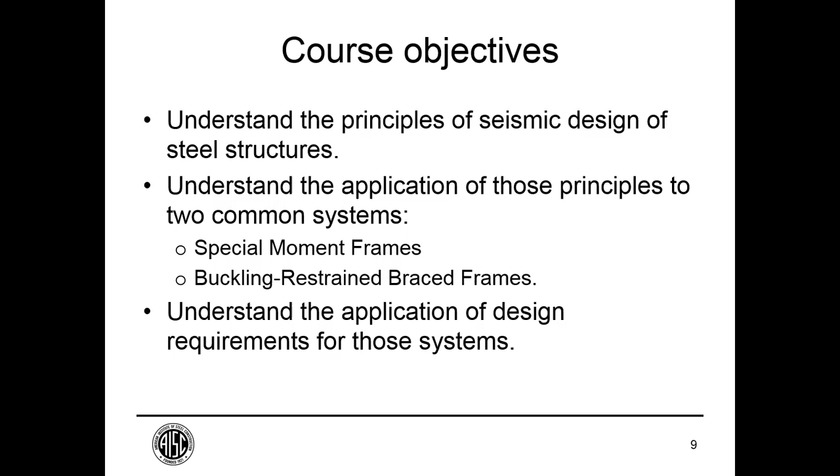We reviewed the course objectives last week. I won't spend more time on this than to say tonight's course on special moment frames fits into it, both showing the principles of seismic design and the application to this system. As always, I would direct you to the resources identified for this class. I did draw on the Facts for Steel Buildings: Earthquakes and Seismic Design in a couple of the answers to questions I received via email after last week's session, and that's a free download from AISC.

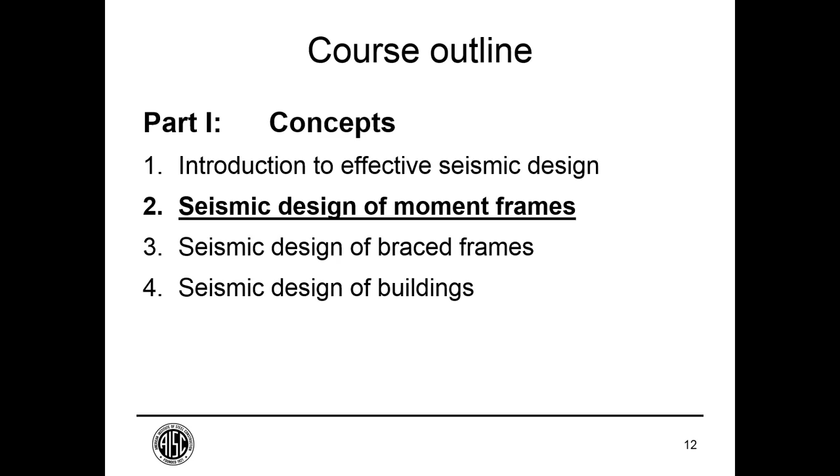Other resources include the AISC Solution Center and Night School. So we've started with introduction to seismic design. Tonight is special moment frames. We'll hit braced frames and buildings in general in the next few weeks, and then we'll get into the design itself. Everything we look at today in general terms for design of moment frames, we'll revisit in a design example in a few weeks.

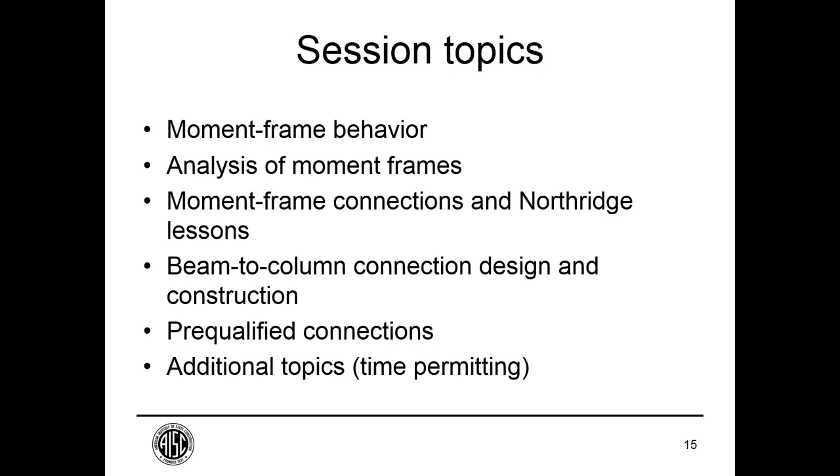So tonight, Session 2, Seismic Design of Moment Frames. We will talk about the behavior of moment frames, the elastic behavior and some of the post-elastic behavior, and how we analyze frames. We will look in detail at the beam-to-column connection, and we've learned a lot in the last 20 or so years after the Northridge earthquake, so we'll be looking at those lessons in great detail. We'll look at how beam-to-column connections are made in the field, we'll review pre-qualified connections, and there are a few other topics I hope we'll have time to touch on at the end of this class.

Let's start with moment frame behavior in general. Our lateral resistance involves horizontal forces. Those horizontal forces have to be resisted through column shear. There are no braces. If you cut a horizontal section across any of the stories, that horizontal force has to be there in column shear, and of course, where there's shear, there's moment. If the column develops moment, the beam has to develop moment.

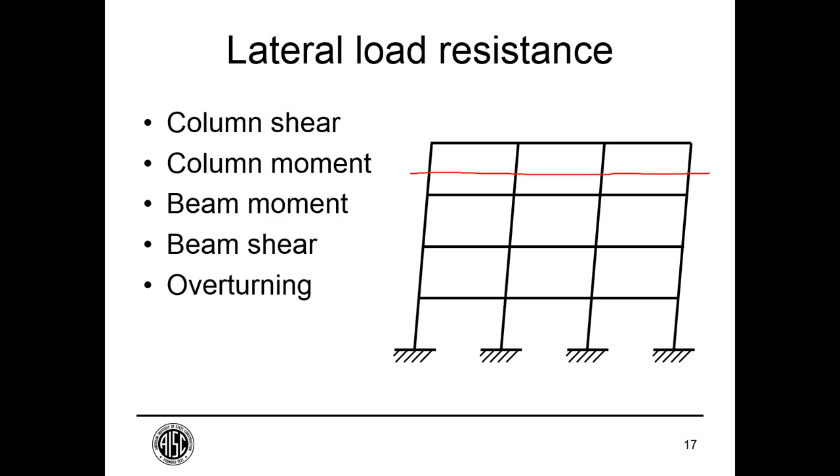The column moment has to go somewhere—it's not just a cantilever from the base. And of course, where there's moment, there's shear, so since the beam has moment, the beam has shear. Those beam shear forces accumulate in the end columns into overturning axial forces. Those are the forces we're primarily concerned with: the analysis of the magnitude of those forces and proportioning, so we get yielding where we want it. Those are the themes of the seismic design of moment frames.

So we'll start with the lateral forces which induce the column shear—there's really nowhere else for the lateral shear to go. So we have a shear diagram that looks like this. I have intentionally made the interior columns appear to have more shear than the exterior columns; that's generally the way these things work. So a little bit more shear in the interior columns, a little less in the exterior columns, but the exterior columns, of course, take the overturning.

As I said, where there's shear, there's moment. This is a diagram of the moment distribution in the columns only, and the assumption here is that the inflection point is mid-height of every story. That's not a correct assumption, but it's a good way to understand the behavior of the moment frames, to understand that the moment reverses and that these columns go into double curvature.

During the course of the earthquake, it's quite complex, and that inflection point moves up and down quite a bit. Occasionally, columns may go into single curvature and have more complicated behavior. But for purposes of design, this condition, where columns are in double curvature with the greatest magnitude of column moment reversing at the beam to column connection, is what we focus on for design.

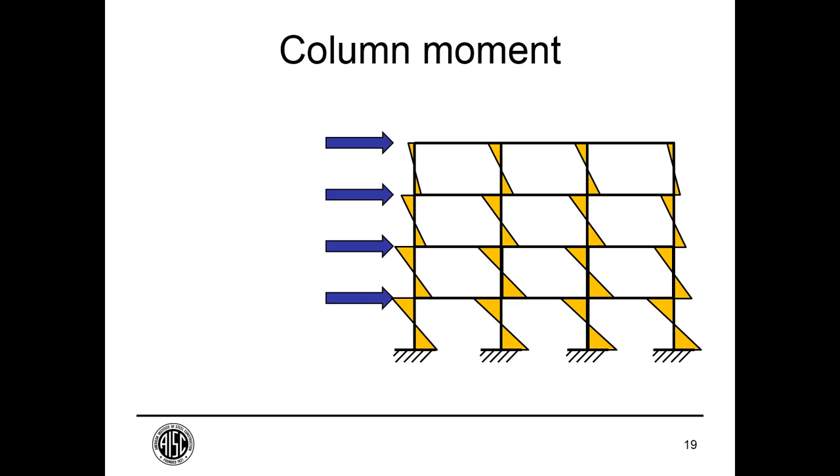So the columns have moment. As I said, if the columns have moment, the beams have moment too. So as that column moment reverses, there is a discontinuity in the column moment diagram. That discontinuity in moment has to go somewhere, and it goes to the beam end. And so the beams have moment diagrams that look something like this.

This is just the seismic moment in the beam. The gravity moment will alter the shape of those triangular segments of the moment diagram, as we'll see later. But this is a good idealization. So the beam moment diagram has a discontinuity at the column.

That moment goes to the column. The column moment diagram has a discontinuity at the beam. That moment goes to the beam. And of course, where there is moment, there is shear. The beams have shear diagrams that look something like this. Perhaps they are equal, perhaps they are unequal. It depends on the bay span, the beam sizes, etc.

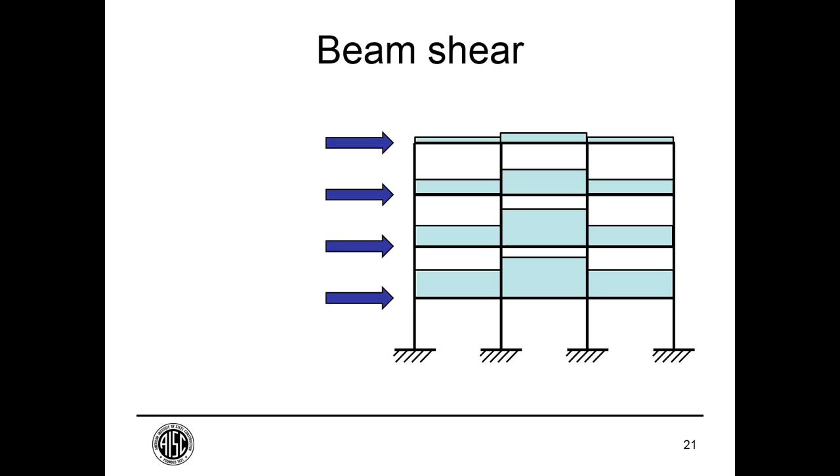And the shear accumulates into overturning forces, which are generally quite large at the end columns of the frame, and there may be some small overturning moment in interior columns if the beam shears are unequal.

So that's a representation of how a frame might behave, and all of that has so far been based on these line diagrams, the center line of the column and the center line of the beam.

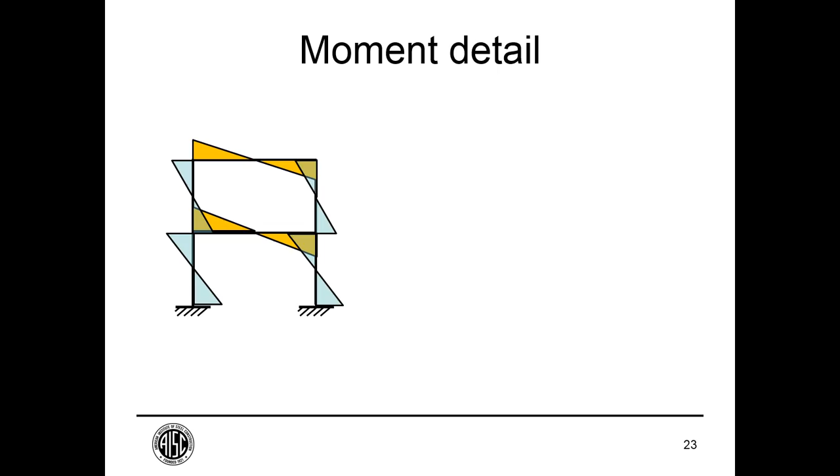Now, if we look at an actual frame, the column has some depth and the beam has some depth. So considering the column depth, the beam stops short of the column, and so the beam moment diagram doesn't go to the column center line, it goes to the end of the beam. And stopping short, the value of the moment where the beam actually exists is less than the value of the moment at the column center line.

Similarly, the beam has a depth, which means this moment reversal in the column doesn't occur over 0 inches, it occurs over the depth of the beam, 21 inches, 24 inches, 30 inches. So that moment diagram, instead of having a horizontal instant reversal, has a reversal over the depth of the beam. And so it has this sort of shape. And that has a couple of implications, as we'll see.

One is similar to the beam: the maximum moment of the column is less than the theoretical moment at the beam center line. It's the moment essentially at the top or bottom flange of the beam. The moment near the center line is close to 0. But also there's a zone here with a steep moment gradient, and we'll look at the implications of that in just a moment.

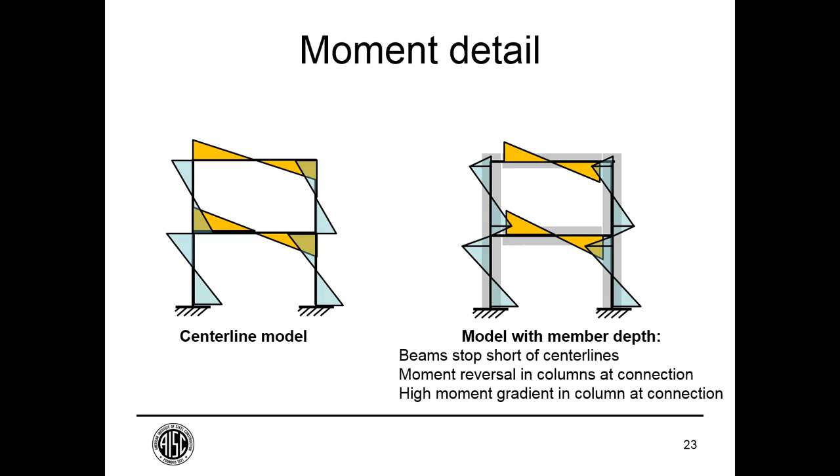So beams stop short of center lines, there's moment reversal of the column at the connection, and a high moment gradient at that connection.

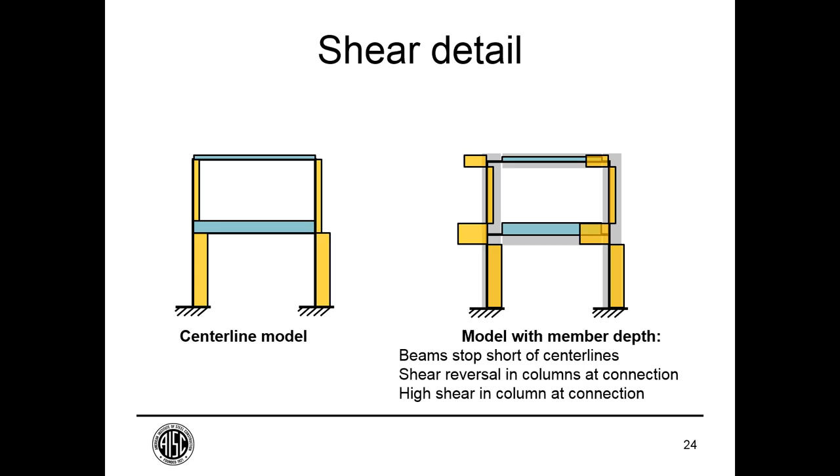Okay, so that's the basic mechanics of the system of the frame. Let's review what we discussed last week, that we would like to encourage for the moment frames flexural hinging to occur in the beams rather than in the columns, so that we might form a mechanism that looks like this.

And you can see each end of the beam is developing a flexural hinge, and the size of this dot indicates the degree of rotation. Of course, this is just a conceptual sketch.

As I mentioned before, you can't really form this mechanism unless you get some rotation at the column base. But for the most part, the way that we idealize and try to encourage behavior is to have yielding occur in the beams and not in the columns. There are a number of reasons for that.

One is that the columns are resisting sometimes quite high axial forces. This also has the benefit of discouraging story mechanisms. So if we encourage flexural yielding in the beams, we are, in so doing, discouraging flexural yielding in the columns.

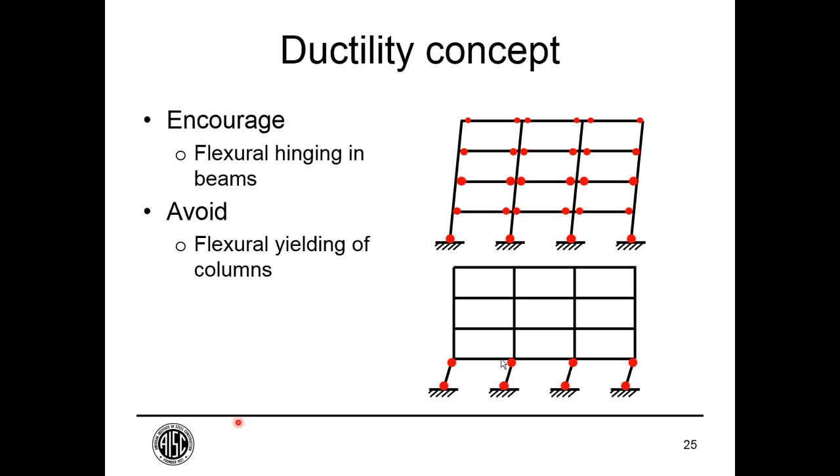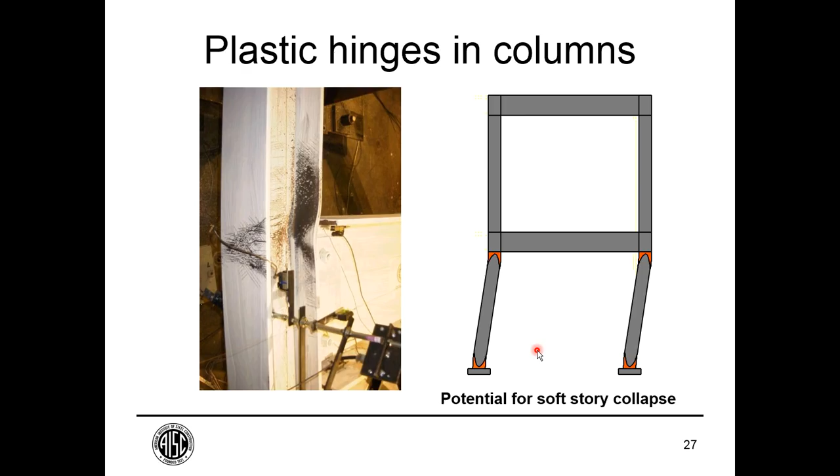This is something that we try to avoid, in part because of the large axial forces that can occur in columns, and also because of the potential for forming story mechanisms, as shown in the diagram on the right. So this would not be compliant with some of the rules we have, at least for special moment frames, and it's behavior that we try to discourage.

Also, this high shear region that we discussed before, the column can yield in shear, and there are potentially some issues with that behavior. One is that it's possible that story mechanisms could form, since we're still getting that rotation in the column.

Also, similar to flexural yielding in the column, we're a bit nervous about high axial forces in these column flanges, and the column flanges having to undergo significant kinking as the panel zone yields. Additionally, that kinking is right adjacent to the highly stressed beam to column flange weld.

Even if we've pushed the plastic hinge away from the face of the column, we still have very high forces in these welds of the beam flange to column flange, and putting the column flange through significant bending strains there can create the opportunity for those welds to initiate a crack and then propagate that crack through the weld. So the provisions, as we'll see later, do allow a little bit of panel zone yielding, but in general try to encourage beam flexural yielding even over panel zone yielding.

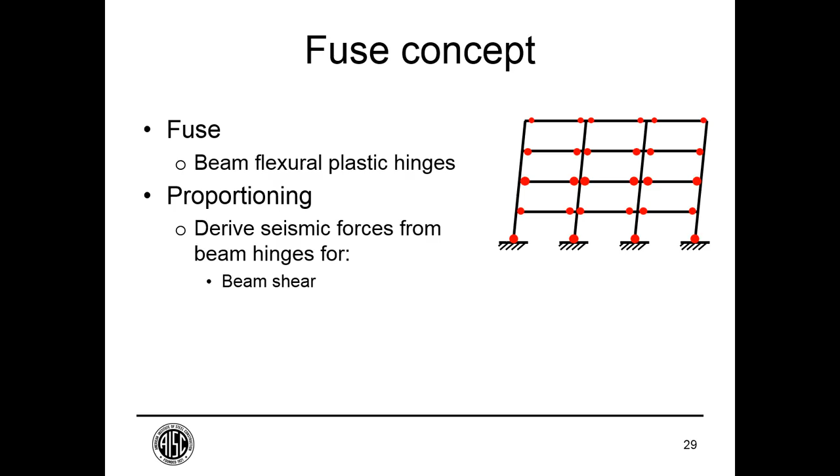Okay, so returning to this concept here, we are proportioning so that we get flexural yielding in the beam. So we start with the plastic hinge formation at each end of the beam and derive the beam shear forces, and we also derive a number of forces in the column. The column shear at that location we will derive from the beam shear, and I'll show you how. The column flexure, essentially, we're deriving from the beam flexure.

The column axial force, essentially, we are with a little bit of imprecision - that column axial force does derive from the estimated proportioning of the beam. And then the column panel zone shear we explicitly calculate from that beam flexural capacity.

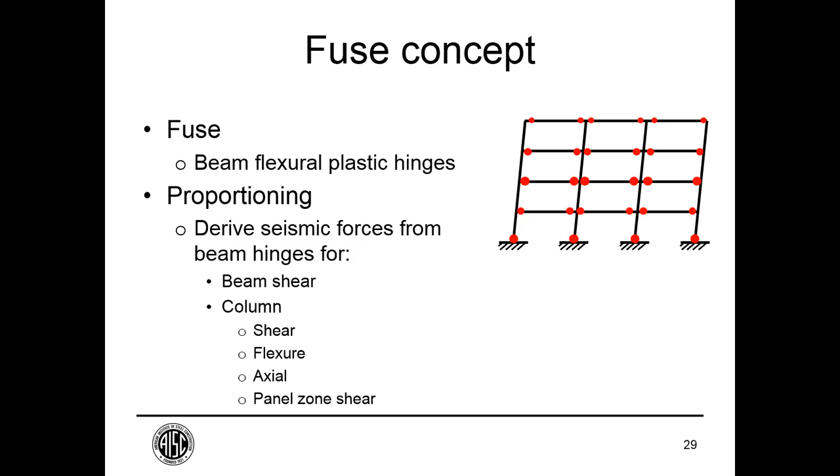All right, so let's start. Let's move on to the elastic analysis of the frame. The frames have different sources of flexibility. All of these sources of flexibility have to be considered. They don't necessarily all have to figure in your calculations.

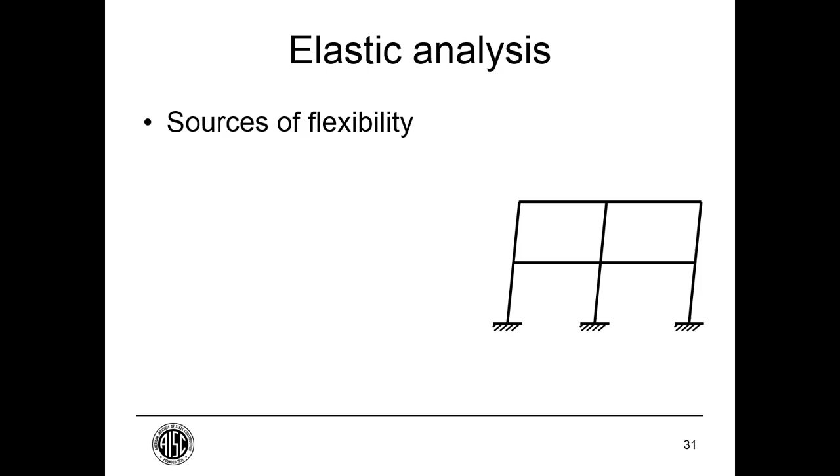Most software will directly be able to address most, if not all, of these sources of flexibility, but in some cases the modeling effort is quite intense. So let's start by listing these sources of flexibility.

Axial deformations of the columns - this is important for taller structures. For a two-story frame such as I've shown here, probably not very important. But if you're dealing with a 15 or 20-story building, obviously you want to be using an analysis that can account for the axial deformations of these columns.

Very important, the flexural deformations of the beams and the columns. This is always the primary source of flexibility of a moment frame. Each of these members has a moment of inertia, and it's the EI over L that accounts for the stiffness of the frame beams and frame columns. So that has to be accounted for in virtually every analysis of a moment frame.

There can be shear deformations in both the beams and the columns. Typically, these shear deformations are quite low, especially for typical story heights and for the span to depth limitations that we have for special and intermediate moment frames. So yes, there are shear deformations, but with a minimum span to depth ratio of 7 for a special moment frame, the corresponding shear in the beam won't be that large, and so the corresponding shear deformation won't be nearly as large as the flexural deformation.

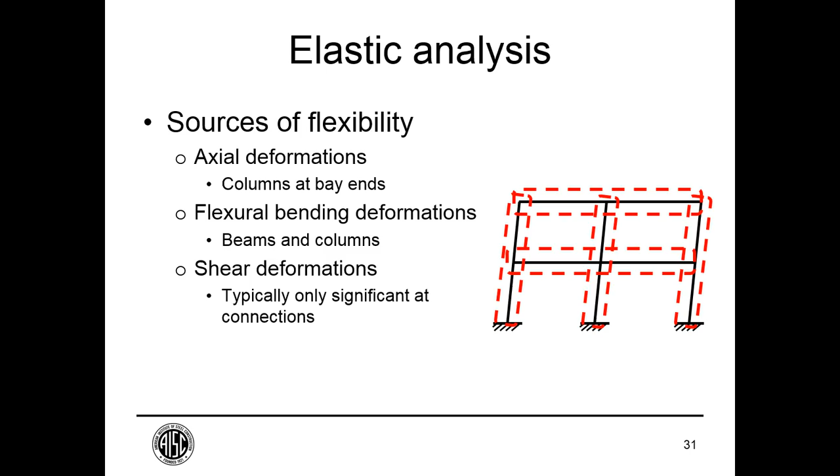Now the shear deformations at the connections may be significant. That's the panel zone shear that we talked about a few slides ago. That panel zone shear can be quite large, and it can cause stresses close to the yield stress of the column web, and that can lead to a lot of deformation that then translates to a lot of extra drift.

Then there are some connections that in moving the plastic hinge away from the column face either weaken the beam or strengthen the beam. So the reduced beam section connection that we'll look at quite a bit in tonight's session, and then in the design, reduces the area of the beam flange and therefore leads potentially to some extra drift, and so we'll show calculations for that later.

Other connections, such as proprietary side plate connection, actually make the beam stiffer at the face of the column, and so create a segment of the beam that is stiffer than the rest of the beam, and that perhaps should be accounted for in the analysis. Certainly, the drift will be lower, and that can be beneficial in allowing perhaps a smaller beam size or a smaller column size.

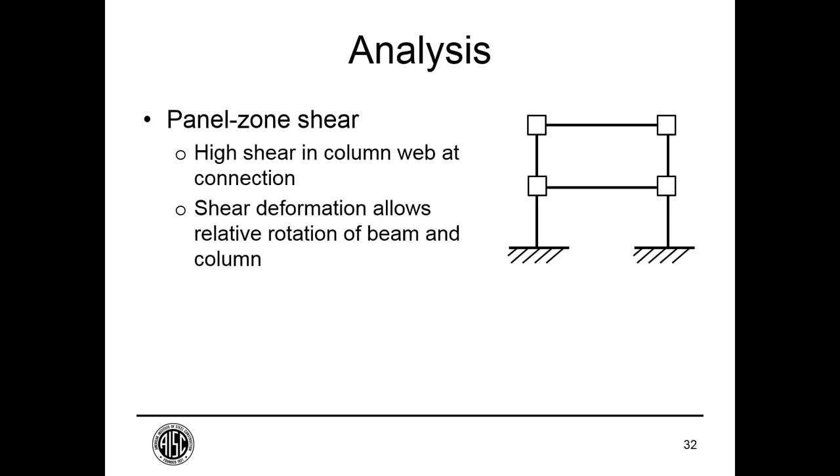Panel zone shear is high shear in the column web in that connection region. Those shear deformations can allow relative rotation of the beam and the column. There are different ways of addressing it.

One way is to model it explicitly, including the flexibility of that panel zone in the model. The other way is not really modeling, though it does have modeling implications—using extra beam and column flexibility to represent panel zone shear flexibility. That is using a center line model. Let's see that in the next couple of slides.

Okay, so here is the model with the panel zone. As I mentioned earlier, the beam doesn't actually reach the column center line. So in this model, the beam flexibility stops at the face of the column, and the flexural length is from face of column to face of column.

In this modeling technique, the flexural length of the column is between the flanges at each story—from the bottom flange at the upper story to the top flange at the lower story, and that's the flexural length of the column. So far so good, but there is the panel zone to deal with.

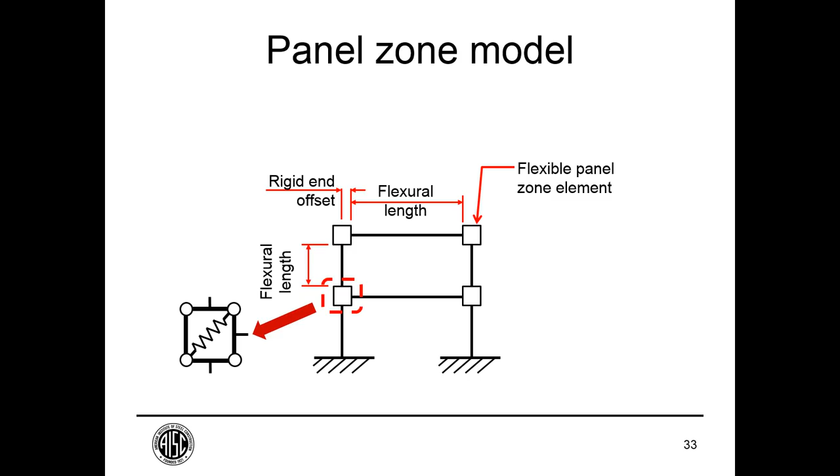Within that zone, it's not a rigid square. It is instead a flexible element that represents the flexibility of the column in that region, including both flexural deformations and shear deformations, which can be significant. This is an accurate way of doing it, and it accounts for the significant sources of flexibility explicitly, but it does require some modeling effort.

So how do you model the panel zone? There is some guidance in a NIST document that we'll see at the end in one of the identified resources. A reasonable way of doing it is to have a scissor element with a spring at every single beam to column connection, representing the stiffness as a function of the column properties and the depth of the beam.

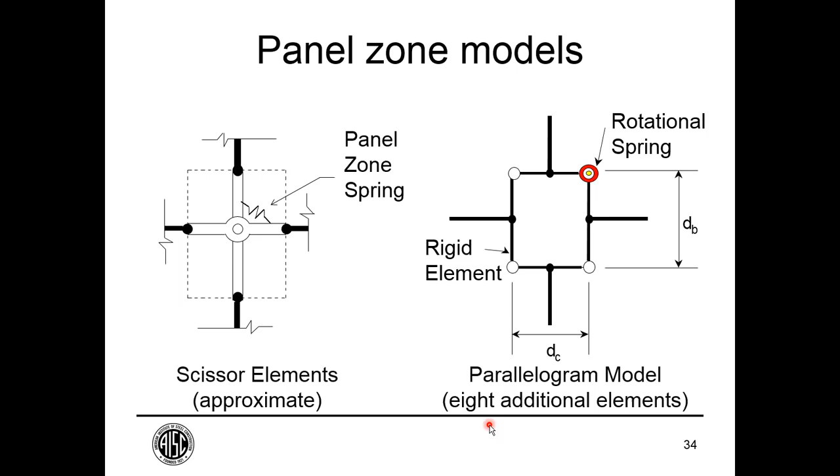A more accurate method that unfortunately requires 8 additional elements is to create a frame at the connection, with the depth of the beam and the depth of the column, using rigid elements and a rotational spring. Again, that rotational spring accounts for the flexibility as a function of the column section properties and the depth of the beam.

The way that most engineers do it, at least for buildings with reasonable span to depth ratios, the simpler way is to allow the flexural length of the beam to go from center line to center line, and the flexural length of the column to go from beam center line to beam center line, without anything that explicitly models the behavior of that panel zone.

So there's a missing source of flexibility, the panel zone, but there's extra flexibility in both the beam and the column. In a number of studies of typical moment frame spans, it's been confirmed that this is a reasonable approximation, and that the drift you get from such a model is reasonably close to the drift you get with a lot more modeling effort.

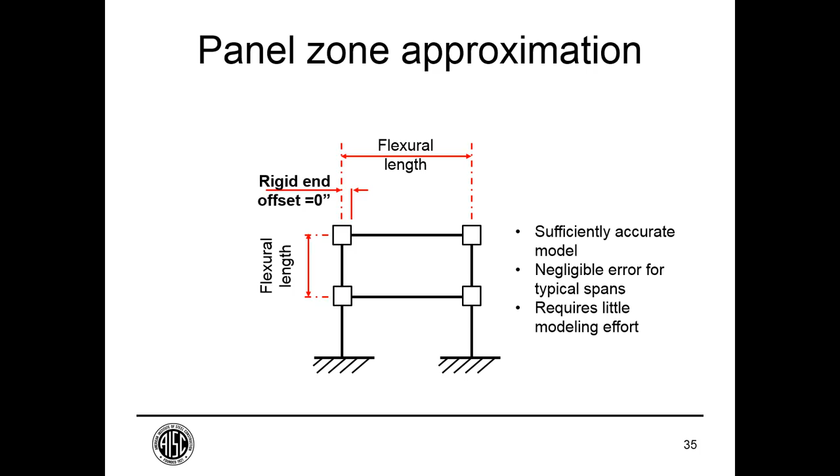Given that our methods of predicting seismic drifts are very approximate, the additional effort of modeling the panel zone does not seem warranted for seismic analysis. This is a sufficiently accurate method. The error is negligible for typical spans, considering our knowledge of loads is very approximate, and our C sub D factor to amplify displacements is also very approximate. So the approximation from this modeling method doesn't add to that error, and it requires little modeling effort. This is recommended for typical buildings.

Now let's go into inelastic modeling. We are assuming that we get plastic hinges at each end of the beam. For purposes of understanding the behavior, I like to use this so-called portal frame method.

Now this isn't exactly the portal frame method that many of us studied in school for design. This is a way to isolate one beam-column subassemblage from inflection point to inflection point, because in my mind that is the unit, that is the brick that the whole moment frame is built out of.

If you understand, design, and proportion this subassemblage correctly, and this is how the building code AISC 341 is written, if you handle this appropriately and then build your frame out of these, proportioning it appropriately as you go, then you get a well-behaved structure. So the key to understanding the moment frame is to understand this beam-column connection out to the inflection points.

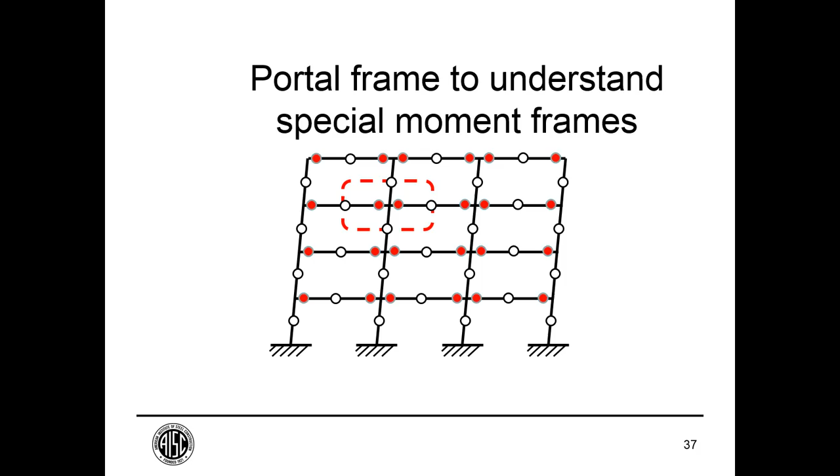So we isolate that element, blow it up, and say that beam has some shear. How do we know what that shear is? Well, we said we're going to start with the plastic hinge formation at each end of the beam.

Now we're looking at a column. We're looking at the right end of the left beam and the left end of the right beam, but the same thing goes. We have two plastic hinges there. We know the value of those plastic hinges. And we've set those inflection points to be at the mid-span of each beam.

So we know that this is a triangular moment diagram, at least as far as the seismic load is concerned. And the shear at that inflection point, or the shear in the beam throughout the length of the beam, is the value of that moment divided by the moment arm from the inflection point to the plastic hinge location. So now we know the shear in the beam, and statics will tell us that there's a corresponding shear in the column.

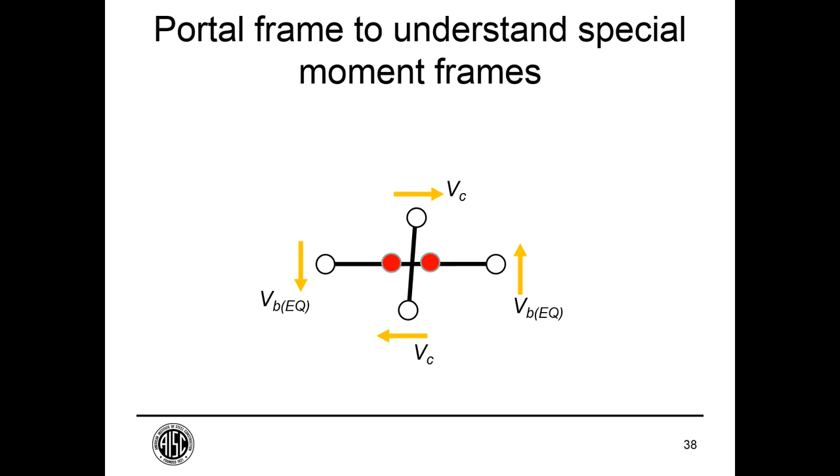For simplicity's sake, I am saying that there is no force being delivered at the floor level. That's obviously not true, but this permits us to simplify the problem and design each of the elements. If you did assume that there was a force at that level, the design is a little more complicated, but by and large you end up with the same sort of proportioning.

All right, so there's our shears in the beam, shears in the columns. Now we're looking at members with depth. There's the moment diagram in the beam going all the way to the column center line. Of course, the beam doesn't exist at the column center line, as I've said before, so the beam stops short there. And there's the column moment going all the way to the beam center line.

And of course, because of the beam depth, that column moment diagram doesn't reverse instantly. It reverses over the depth of the beam. And so that's the actual column moment diagram and the corresponding shear diagram. And that gives us the panel zone shear.

So for each of these subassemblies, I can get essentially design moments in the column, design shears in the column, design shear in the beam, design shear in the beam-to-column connection in addition to the moment. I can get all of these forces that will help me design the beam-to-column connection just from this subassemblage.

Okay, so we start by analyzing the beam, and we assume the plastic hinge forms near the face of the column. We account for things such as the expected strength of material, as we discussed last time, that 50 KSI material doesn't yield exactly at 50 KSI. It probably yields closer to 55 KSI. And then as the plastic hinges go through significant rotation, there's some strain hardening, and that strain hardening might increase the flexural strength 10 or 15%.

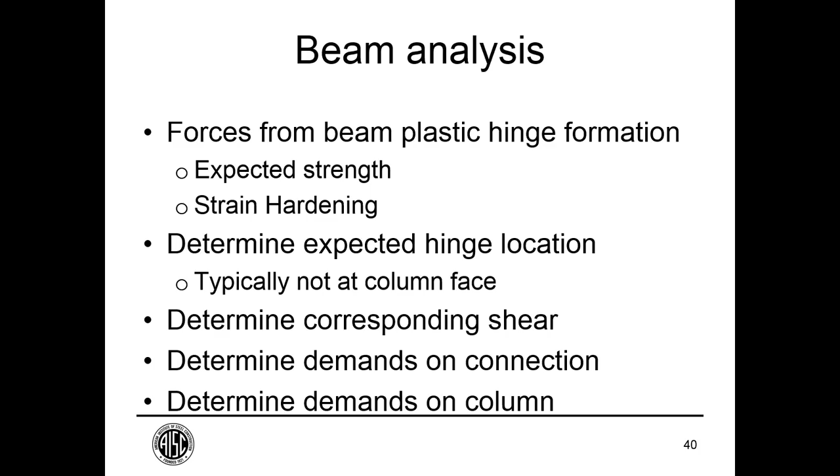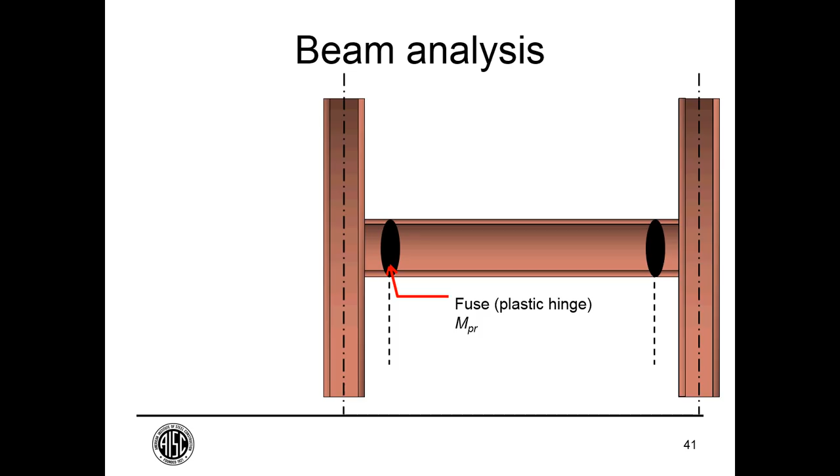That offset from the column face is given the symbol S sub H. As I said, the reduced beam section connection or reinforced connections such as the side plate or bolted flange plate may change this slightly.

So the moment at the column face is somewhat greater than the probable moment at the plastic hinge location. And the demand at the center line, which of course is fictitious because the beam doesn't exist there, that MCL is even larger still. So we're following that moment diagram up to get the seismic moment at the column center line.

The lengths involved are the center to center line length from column to column minus half a column depth at each side, which gets us the moment at the column face. Then minus this dimension S sub H at each side gets us the distance from plastic hinge to plastic hinge, and that distance is given the symbol L sub H.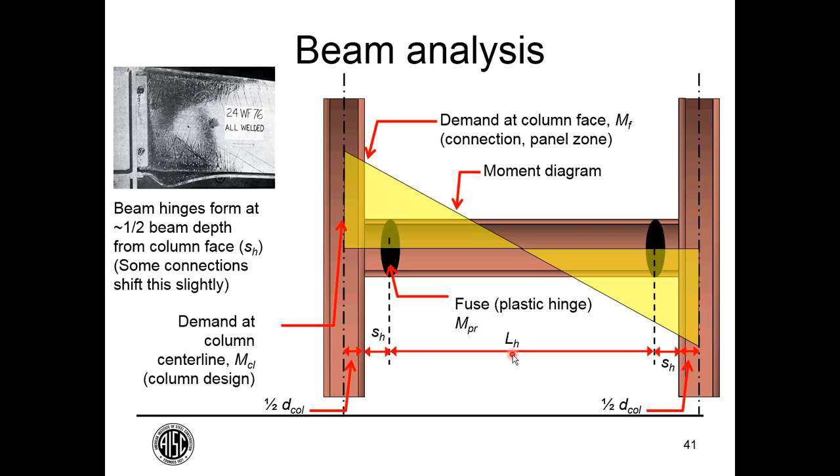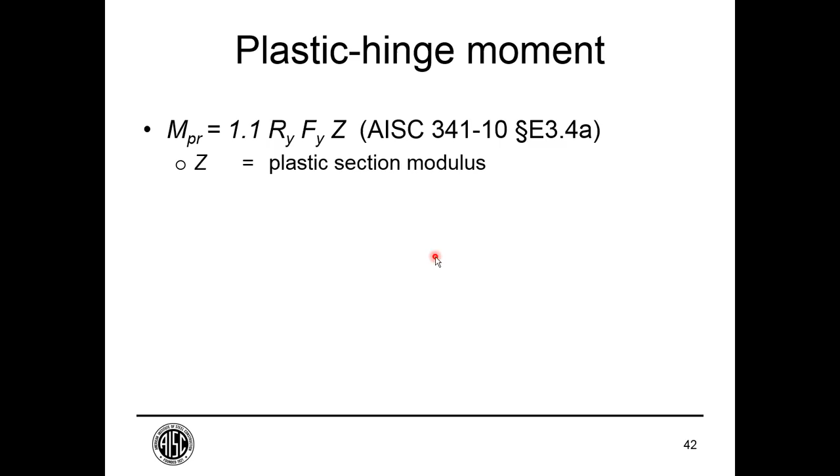The value of that probable moment at the plastic hinge location, given in the 2010 seismic provisions, is 1.1 times Ry Fy Z. Z is the plastic section modulus, and it's going to be reduced for reduced beam section. Fy is the specified minimum, and Ry is that factor representing material over strength. So Ry times Fy is the actual expected material yield strength.

For the A992 material that we use quite a bit of for a special moment frame, that Ry Fy is going to be 55 KSI. That factor 1.1 represents strain hardening.

Now, in the 2016 provisions, it's slightly different. There was a bit of an inconsistency, not much, but we'll talk about AISC 358, the pre-qualified connection standard. That standard gives a value of 1.15 for strain hardening, while the seismic provisions gave 1.1. In 2016, it says just look at AISC 358.

So our beams now strain harden a little bit more than they used to, 1.15 instead of 1.1, but essentially the same method. We get the so-called probable moment at the plastic hinge location, we know this length between hinges, and we can solve for the shear.

So these are just seismic loads. The moment here forms a full plastic hinge under seismic. It doesn't matter what it was doing under gravity before then. Now that it has these plastic hinges formed, there's a corresponding shear that corresponds to these plastic hinges.

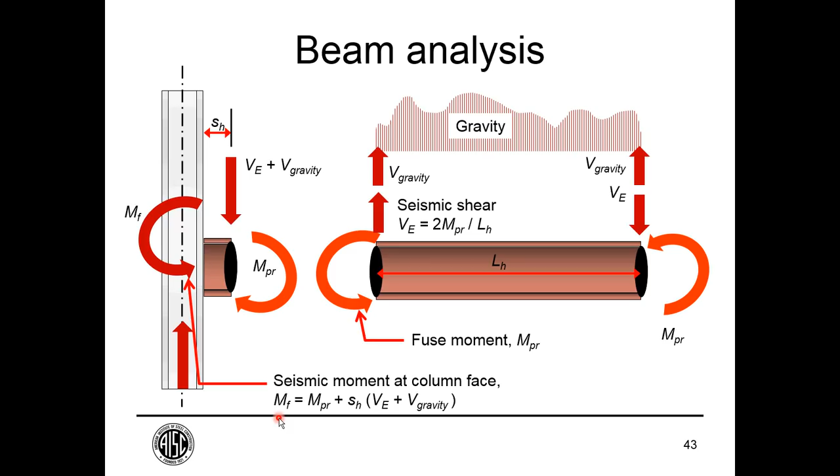Here's the moment at the column face, and we're going to need to check that section at the column face. Then we'll use the moment at the column center line for calculations involving the column. That moment at the center line is again the probable moment at the hinge plus the shear times the eccentricity. The only difference from the previous slide is that the eccentricity has now grown from the dimension S of H to S of H plus half a column depth, because we're taking it to the column center line.

Now let's turn our attention to the column. We have some forces based on the beam strength. We also have a requirement for so-called strong column, weak beam proportioning. Again, this is to promote beam yielding over column yielding.

Strong column, weak beam analysis is a rule of thumb about proportioning. There's no reason you can't look at this instead as the required flexural strength of the column as a load coming from the expected flexural strength of the beam. It's exactly the same sort of calculation. We start with the capacity of the beam and determine its effects in the column, and make sure the column has sufficient strength.

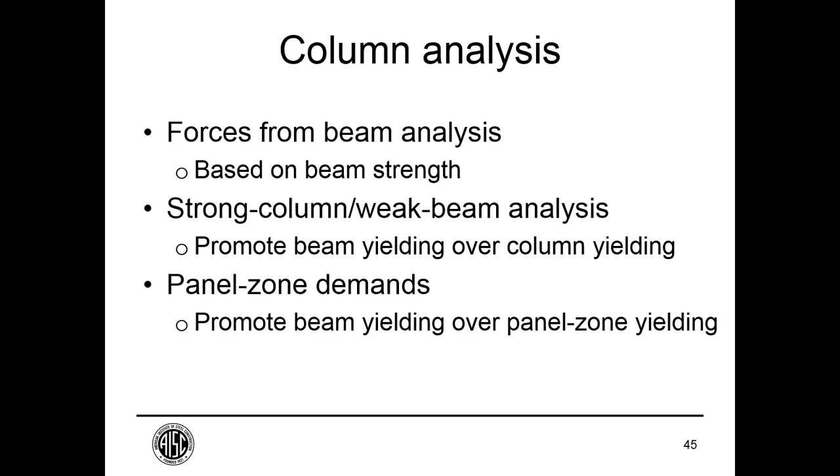We also use this capacity from the beam to compute the panel zone shear demands, again to make sure we get flexural yielding of the beam rather than just panel zone yielding.

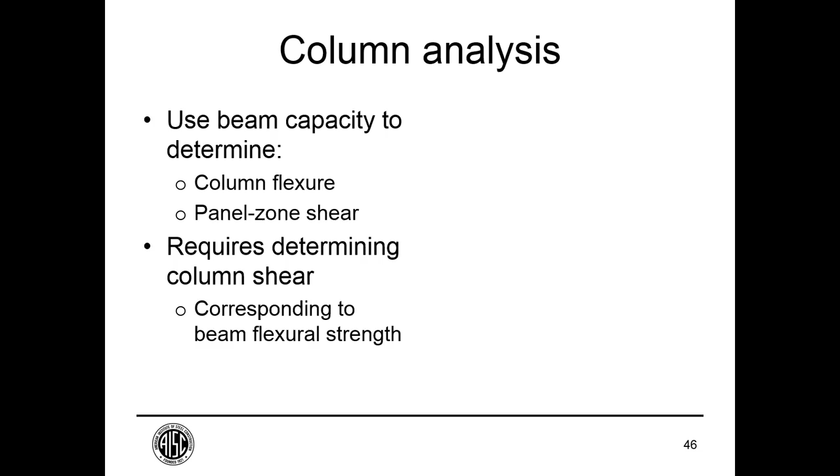The column shear is going to affect the panel zone shear demand, so we use that little subassembly, that portal frame subassembly I showed you before, to calculate those column shears. The beam capacity gives us the column flexure and the panel zone shear. It requires determining our column shear corresponding to the formation of the plastic hinges, to compute what the net shear is in the panel zone.

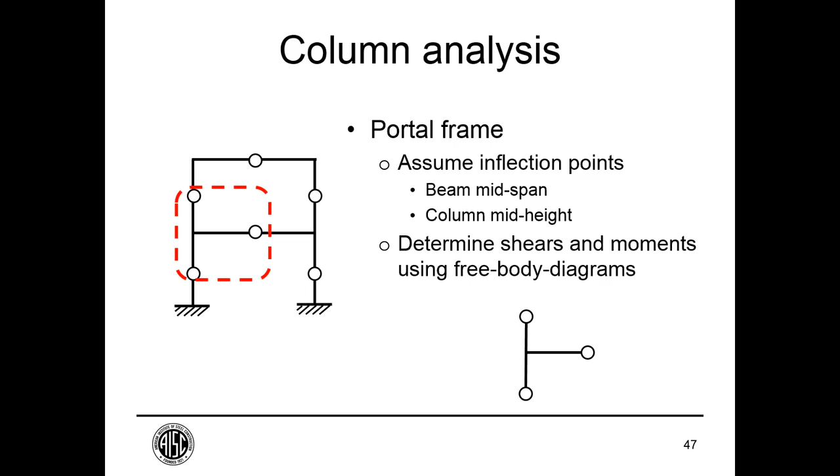Again, we're assuming these inflection points at the column mid-height and beam mid-span, determining the shear and moment diagrams from a free body diagram like this. Here's a little subassembly. In this case I'm looking at an end column, so it looks like that. There's the shear we got from the beam analysis.

That seismic shear is constant, so this is just the seismic shear component of it. Then to balance that out, there's the column shear. I'm assuming that's a constant column shear from inflection point to inflection point, which is a simplification, but is acceptable.

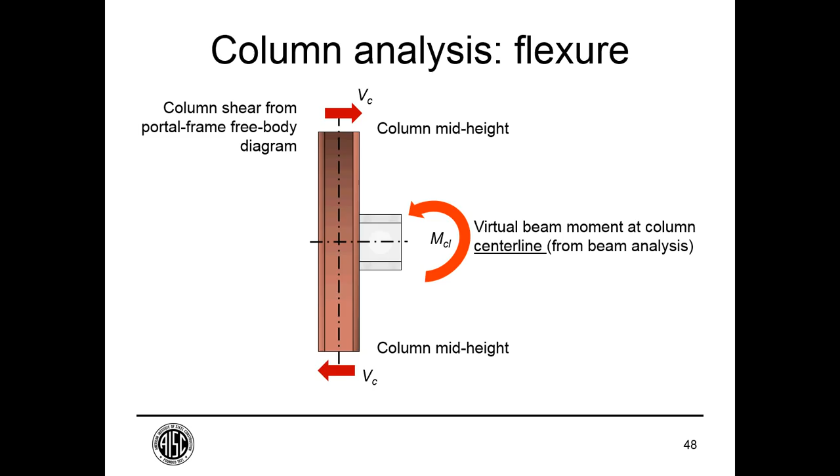Okay, so there's the moment—this is the moment at the column center line. I've drawn it off on the right, but you can imagine it being applied right at the column center line. We've shown how to derive that by projecting the probable moment to the column center line using the shear times the eccentricity. And here are the column shears from that little portal frame subassembly shown before.

All right, so how do you get that column shear?

Well, you have to look at the subassembly, and the subassembly looks slightly different depending on whether we're at the roof location, at the roof elevation, or at a floor elevation, and whether we're at an end bay or an interior bay.

So if you look at the upper left corner like this, there's half a beam and half a column, and the shear in the column is multiplied by the height of the column, or half the height of the column, the same way that the shear in the beam is multiplied by half a span of the beam. So the proportioning is such that for statics to work out, the shear in the column is going to be equal to the shear in the beam times the ratio of L over the height of the column from story to story, L being the span of the beam and H sub C being the height of the column.

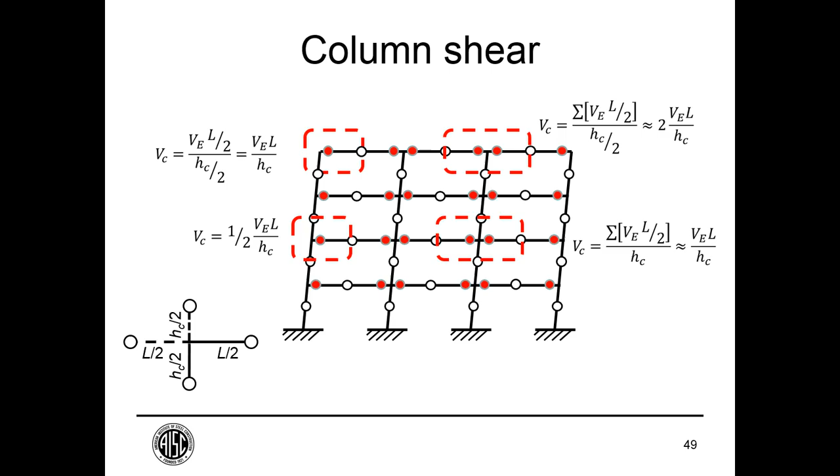Okay, so now we'll take a few minutes to talk about the Northridge earthquake and moment connections.

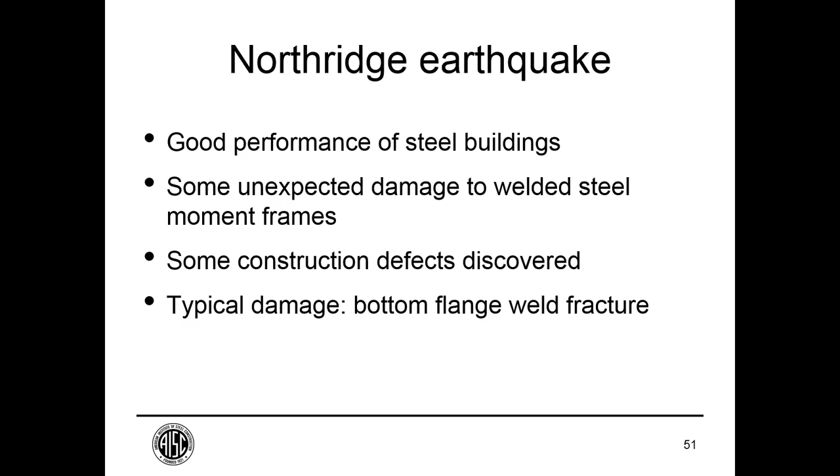Okay, so in the Northridge earthquake, we had good performance of steel buildings. There was a lot of observation of some damage to beam to column connections. Some of that we thought was damage turned out to be construction defects, but there were still lessons to be learned from that. The typical damage was bottom flange weld fracture or fracture in the adjacent metal.

Why did we have this damage? Well, there was high strain at the beam flange to groove weld connection. Nothing we did in our design reduced the demand at the column face, and so that's where it was a maximum, and that's where, as we talked about before, there's a highly restrained condition that doesn't tend to yield, it tends to rupture.

Also importantly, in the practice of those days, beam webs were bolted rather than welded. That meant that the full section perhaps participated away from the column face, but near the column face, the bolted joint of the web was not nearly as stiff as the welded joints of the flanges, and the bolted web tended to slip a little bit, so most of the moment and some of the shear had to be transferred in the flanges. The weld access holes used in the Northridge days did not relieve the stresses, and they did not relieve the restraint in that highly restrained condition, and so rupture was the result.

Column flange bending without continuity plates and stiffeners. It appeared that there was a lot of column flange bending that perhaps led to some of the fractures. Inadequate stiffening was perhaps a source.

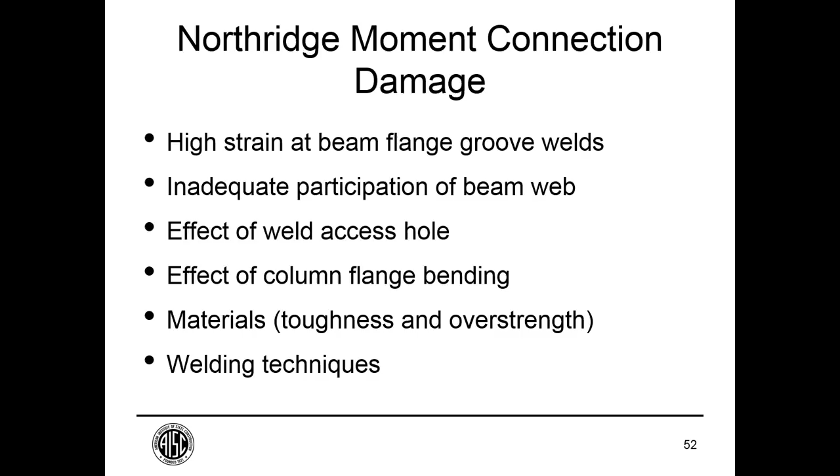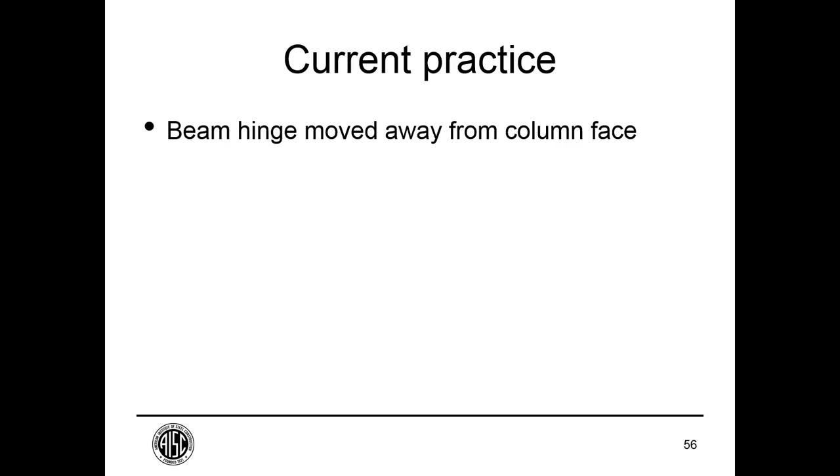One is the beam hinge is moved away from the column face. Each connection does it a little differently. We tend to weld the beam web, and so that participates more and takes some of the stress off the flanges. The weld access hole, often we use a weld access hole that's enlarged so that some of that restraint is relieved and you can spread the strain out over a greater length of the flange. We deal with backing differently, and we'll show you in the next couple slides.

This is one of the pre-qualified connections, the so-called WUF-W, welded unreinforced flange welded web. A couple of things are different. One is you will see DCW, demand critical weld. That's a high toughness requirement for the weld material. It's used in a number of the joints here.

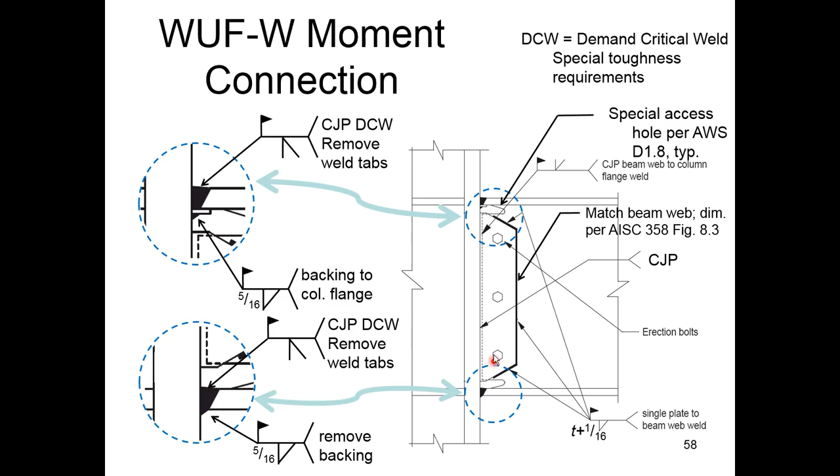At the bottom flange, that's not enough. We ask for the backing to be removed. For this type of connection, the backing's removed, it's back gouged, and it's re-welded with a reinforcing fillet. The weld access hole is improved. The web is welded. So a number of things are subtly different, even if we're just essentially welding a beam to a column. We're doing it with a lot of improvements that give us much better behavior out of that connection.

At the column splice, we need to be aware of potentially high stresses, and so we taper width and thickness at transitions. Weld tabs are removed, and we grind. Backing can remain in place at these butt joints. The T-joints are much harder on the material. The butt joints are not as sensitive. And there's no supplemental fillet required.

In the 2016 seismic provision, the partial joint penetration weld is allowed under a number of limitations, and it has to be 85% or greater than the effective throat. So a partial joint penetration weld with high toughness that fuses most of the joint seems to be good enough to allow the column splice to function quite well.

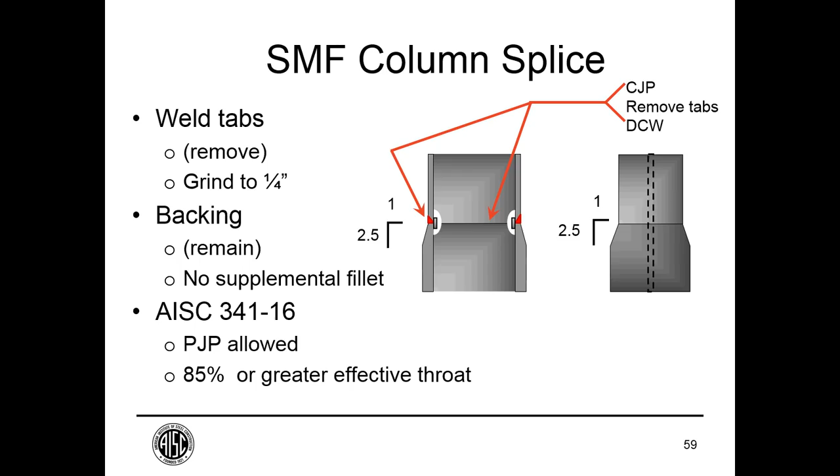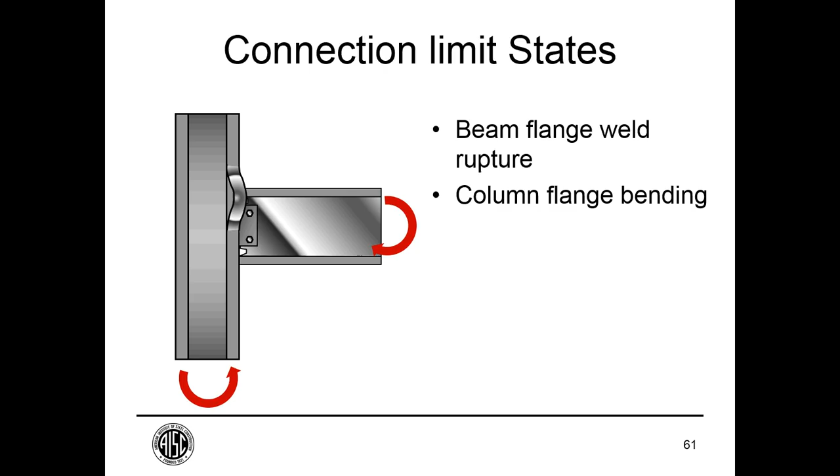When we design these beam to column connections, we're transferring moment from the beam to the column. There are a number of different limit states we check: potential for weld rupture at the flange, column flange bending, web local yielding top or bottom, web crippling where it's in compression, and panel zone shear can also occur. We have to check all of these things in our beam to column connections.

I'm not showing the web compression buckling - that would be for a cantilever. This is more for a frame. And for panel zone yielding, the participation of the beam on the other side is also important. Of course, we also have to design that beam shear connection.

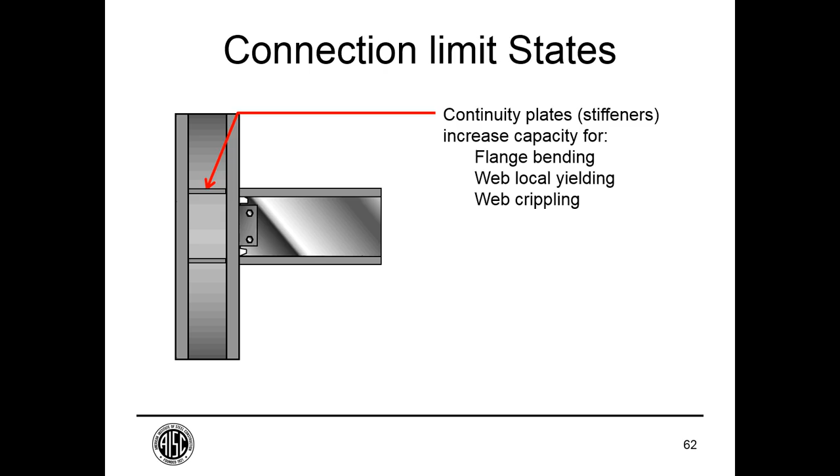If we come up short on some of these limit states, we might add a continuity plate, or we might add a doubler plate.

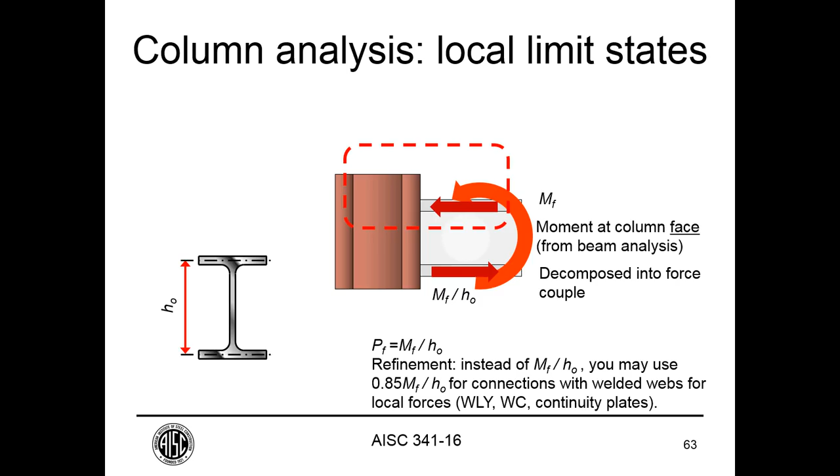So for checking these, we calculate the moment at the column face, and we turn it into a point load. That point load is the moment at the face divided by the depth between flanges. There's a refinement in the 2016 provisions that allows us to take 85% of that if we have a welded web - we assume 15% might go to the welded web.

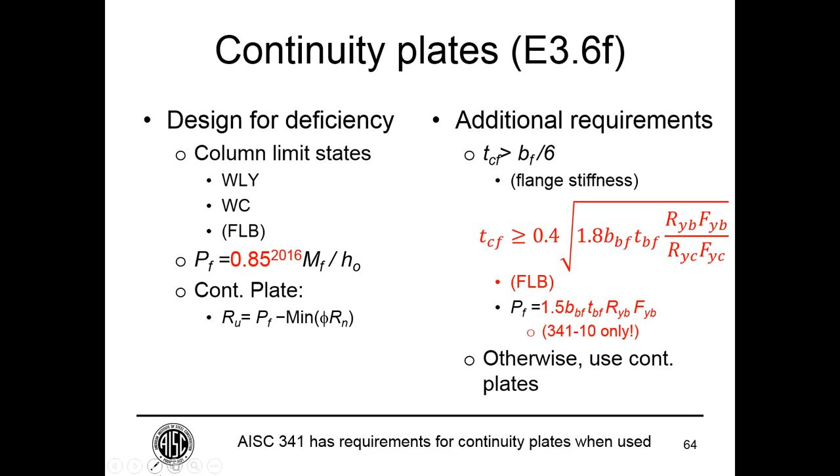If we come up short in any of these, we need to design a continuity plate for the difference in capacity. There are also some triggers for continuity plates special to moment frames. If the column flange thickness isn't thick enough according to this test - essentially a stiffness test - we add a continuity plate. There's also this check that's in the 2010 provisions but is eliminated in 2016; it's essentially a concentrated load checking the column flange for flange local bending with a very high load, and it's already taken care of, so we've dropped it from the seismic provisions.

Continuity plates have a minimum thickness. If it's a one-sided connection, half the thickness of the thicker beam flange. If it's a two-sided connection, in the 2010 provisions it should be the full thickness of the thicker flange; in the 2016 provisions, down to 3/4. And there are very large clips required by AWS D1.8, essentially to limit the welding to the flat part of the web.

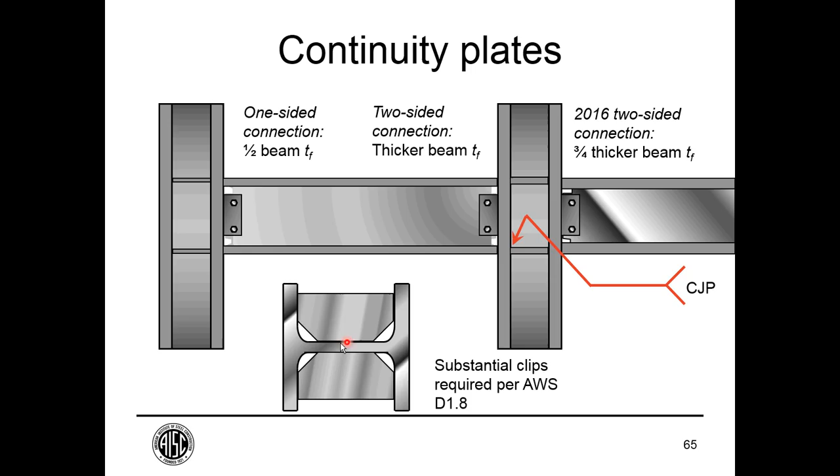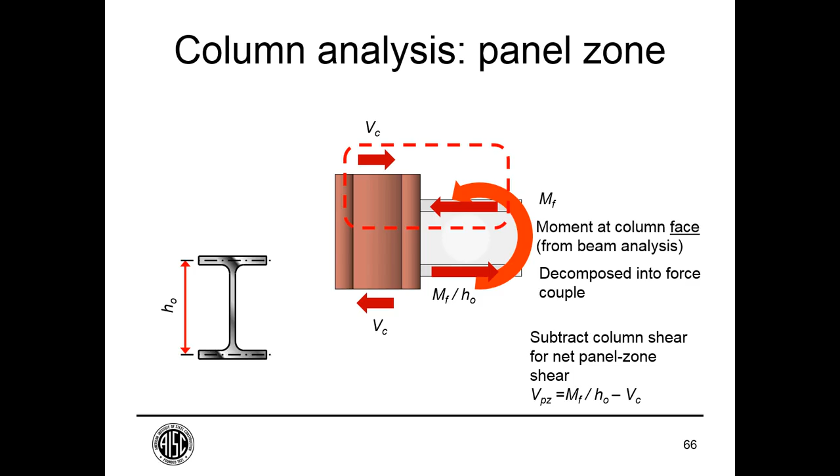We do a similar thing with the moments at the column face to check the panel zone yielding, but as I said before, we subtract out that column shear, and that gives us the panel zone shear. The 85% does not come into it here. And then we turn to AISC 360, and we get different strengths for panel zone yielding.

You have to check to see if your axial force is very high, and what your panel zone deformation is - whether your panel zone deformations have been accounted for, which isn't really an important question for the seismic analysis because we're deriving our forces from the capacity of the beam. Generally, I just like to use the web, because that second term - the flange bending term - involves a lot of deformation to mobilize.

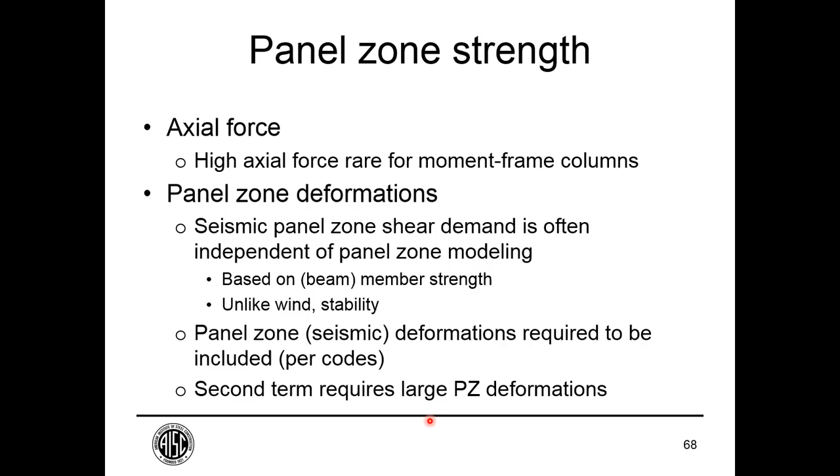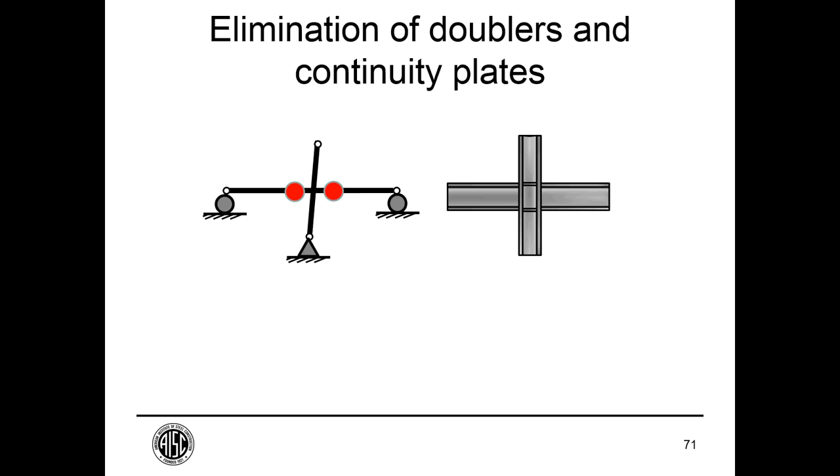Okay, we're going to deal with this quite a bit in the design example. If you have a design and you found that you need continuity plates and doubler plates, you can look at this subassemblage as a little spring. Shear in the column leads to some relative beam to column rotation in this subassembly. Now you could redesign it with a heavier column and a lighter beam and get the same stiffness in the subassembly. So your overall frame won't know the difference, but you'll have a heavier column and a lighter beam, and maybe you won't need the continuity plates and doubler plates.

So I'm giving you some equations here. I don't want to derive them in this talk, but essentially we're saying the flexibility is from two sources. There's the flexibility of the column and the flexibility of the beam, and these are additive. And if you want, after your redesign, to have the same flexibility, you can solve, if you've picked a column, for a beam stiffness.

So here we go. H is the story height of the column, L is the beam span, NC is the number of columns, so it would be 2 here and 2 beams here, but it could be different in different areas. And you solve for the moment of inertia required of the beam based on your redesigned column and your original column and original beam.

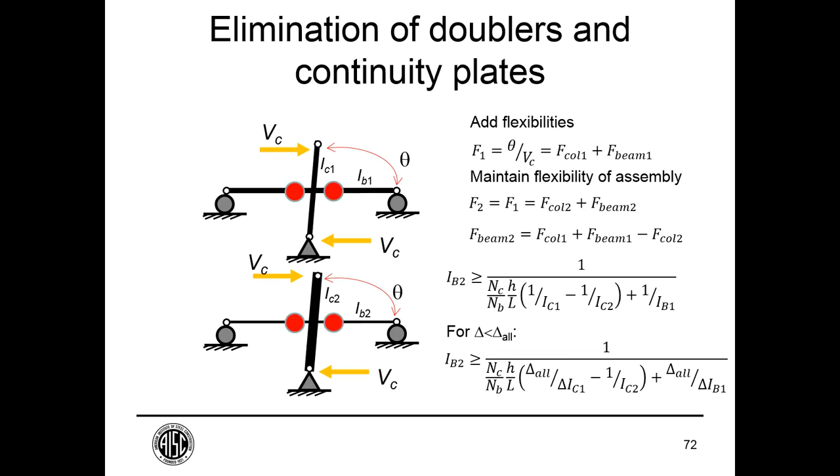And if you're not at the drift limit, you can take advantage of that as well and say, well, I can solve for the beam that I need rather than the beam that's exactly the same, leads to the same stiffness as I had before. So...

Let's take a few minutes to go through the construction of a moment connection. Here's the beam in place. The flanges have been prepped. You can see the weld access holes. This is slightly out of date because now we would expect that web to be CJP welded to the column flange for most connections as well.

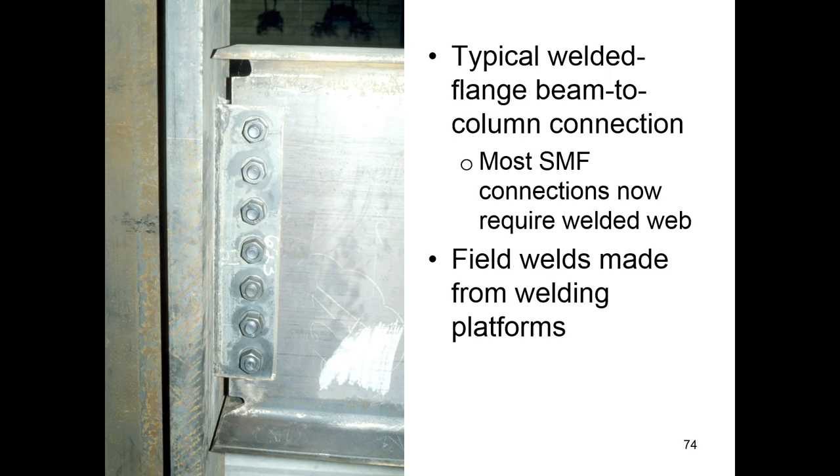Okay, so the backing bar has been put in place with a few tack welds. These tack welds are then incorporated into the final weld. That steel backing is 3/8 of an inch. Then the weld tab has been added, so that creates a groove. So at least at the end, the starting and stopping can take place outside of the final joint. But as I said before, reaching through the web, you have to start and stop at the bottom flange.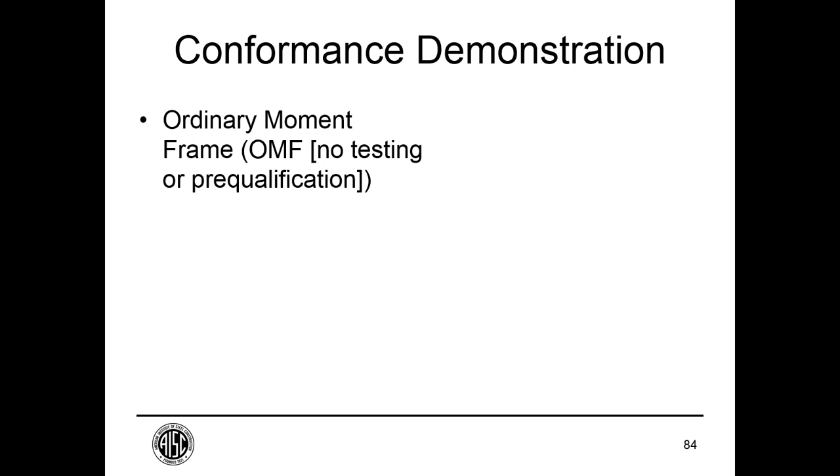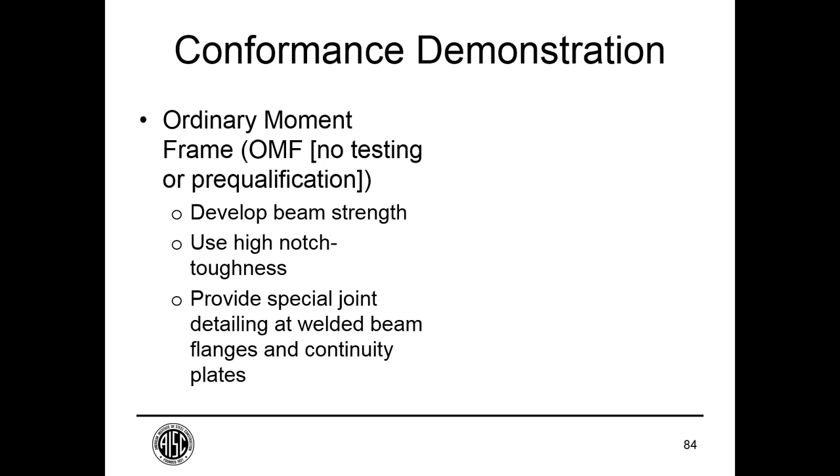All right, switching gears a little bit. For ordinary moment frames, we just have a requirement to develop the beam strength, use notch-tough materials, and some special detailing at the joints. For special and intermediate moment frames, we have to use a pre-qualified connection or one that's qualified by testing up to a defined rotation.

So that brings us to our pre-qualified connections. If we use qualification testing, we have to match pretty closely what we're going to use in the building. If we use pre-qualification, well, a panel of experts has looked at the existing testing and decided what buildings can be built, or how much this testing can be extrapolated for application to buildings. And so there are limits on what you can do with these pre-qualified connections without further testing.

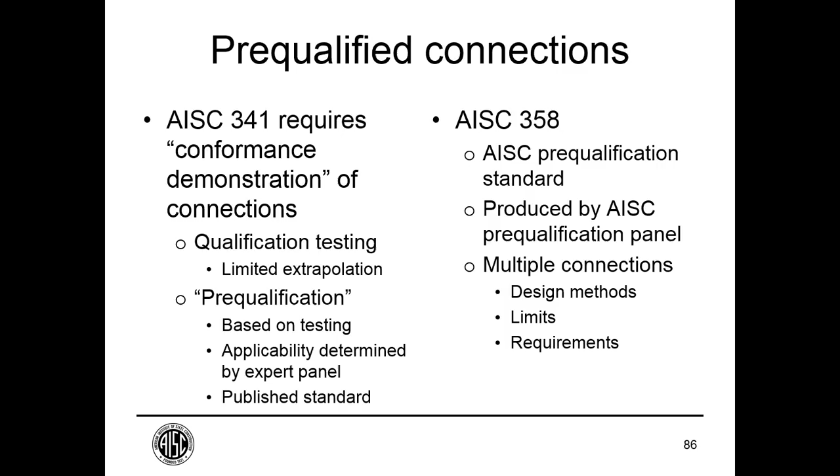And this is in a published standard, AISC 358, which we call the pre-qualified connection standard. And there's a special AISC panel that has gone through multiple connections and defined the design methods, the limits of applicability, and other requirements. I'm going to go through most of those right now.

The reduced beam section connection weakens the beam. The face of the column has relatively less demand, still greater moment, but the demand capacity ratio should be lower there. We use capacity design to proportion everything else so that we get most of our yielding in that reduced section.

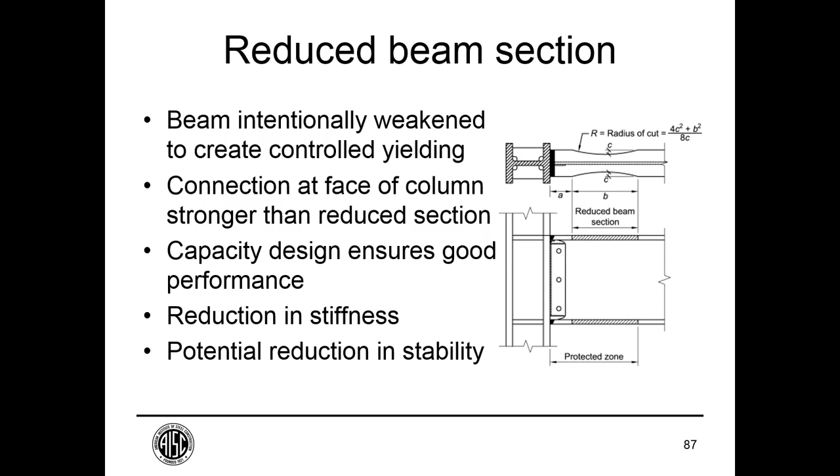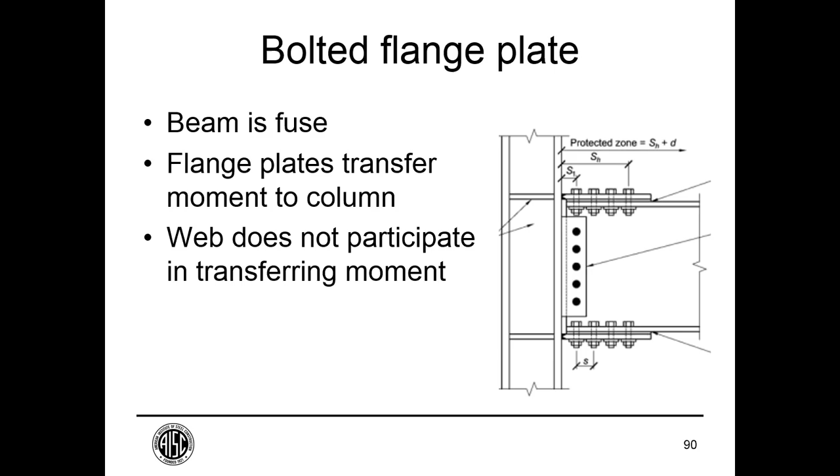We do capacity design starting with the beam flexural strength and following from there. Bolted flange plate: the beam is the fuse, the flange plates transfer the moment, not the beam web in this case. There are all sorts of bolt limit states to check.

We've talked a little bit about this welded unreinforced welded flange. It looks a lot like the pre-Northridge connection, but with improved materials, better toughness, limited tensile strength, improved welding details, including the weld access hole and backing details, removal of weld tabs, and improved QA, QC.

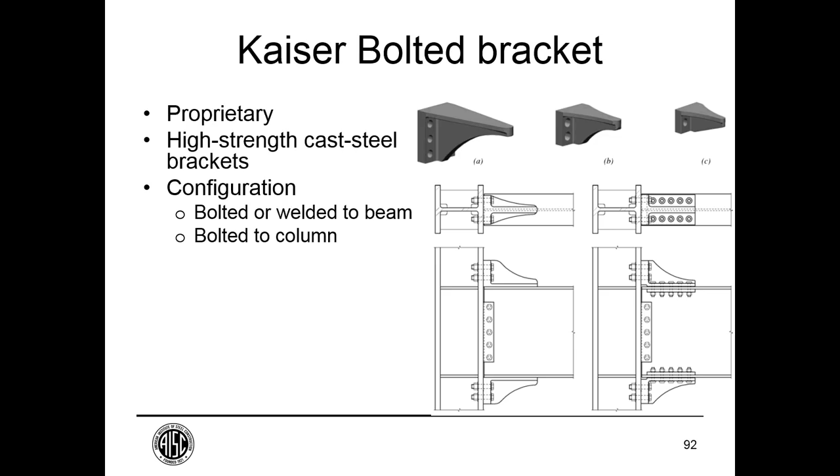Kaiser bolted bracket is a proprietary connection, very similar to the bolted flange plate. It could be welded to the beam or bolted to the beam, but it's always bolted to the column. The beam is, of course, the plastic hinge, the fuse, and we use the forces from the beam to design the rest of the connection and the column.

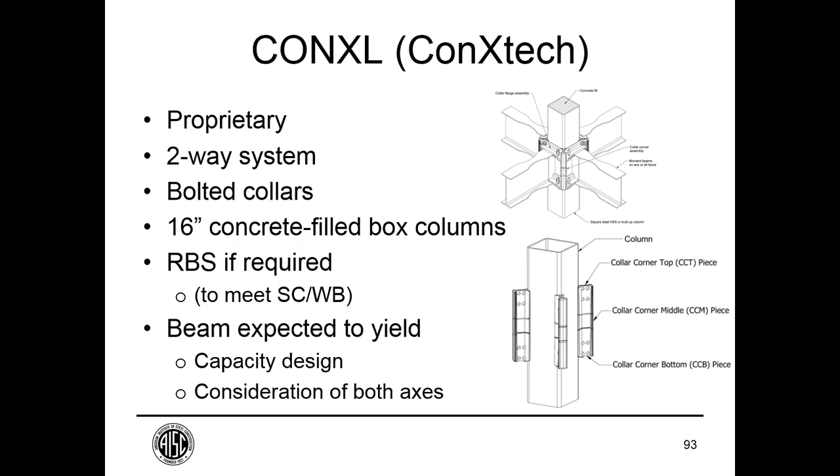The ConXL connection by ConXtech is a two-way connection, another proprietary system. Bolted collars on a 16-inch concrete-filled box column. If required, if the beam is large enough, they'll do an RBS in it to meet strong column, weak beam. The beam is expected to yield, and we'll do a capacity design. One of the interesting things about this one is that it's bidirectional, so it needs examination of both axes.

I don't have this in the presentation, but in the 2016 provisions we have the side plate connection, the Simpson strong frame, and the double T connection—which is not the double tree connection from Hilton, but the double T, similar to the bolted flange plate.

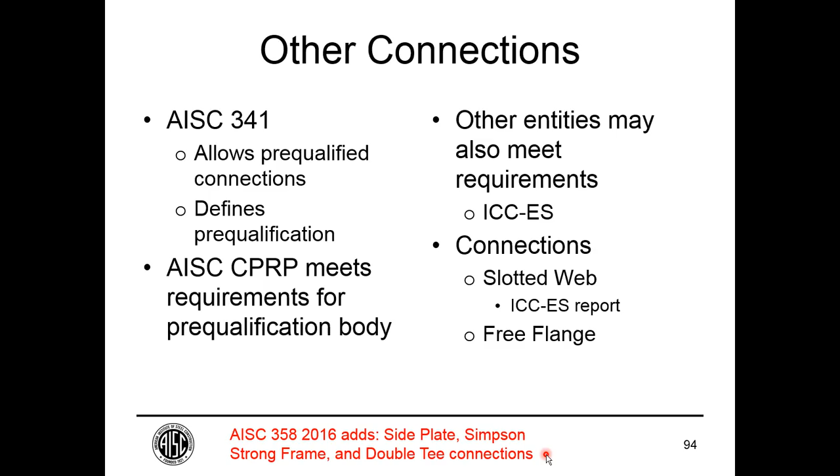AISC 341 allows pre-qualified connections and defines what pre-qualification is. It does not say you have to use AISC 358. However, the AISC panel is definitely an appropriate panel for pre-qualification. There are other entities that conform to the requirements of pre-qualification, committees, ICC Evaluation Services puts together a panel, and they've looked at different connections: slotted web, and there's also the free flange connection that's been tested extensively, and welded haunch.

All right, I have just a few minutes here. I want to touch on a couple of additional topics.

Stability bracing is required. We're bracing at the column, bracing near the plastic hinge location—not within it, but just adjacent to it—and bracing at a defined spacing. The seismic provisions say if you have an adequate composite deck, you can get rid of that first brace adjacent to the plastic hinge.

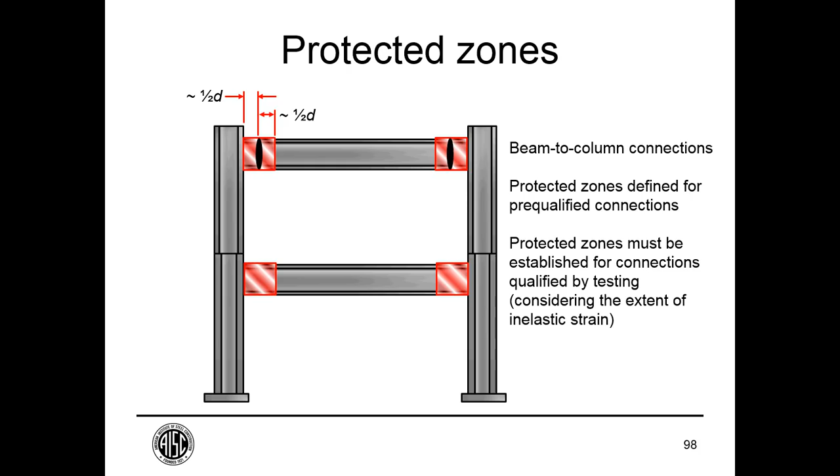It's the protected zone. Our special weld toughness requirements—these demand critical welds—occur at the beam to column connections, at the column splices, and column bases.

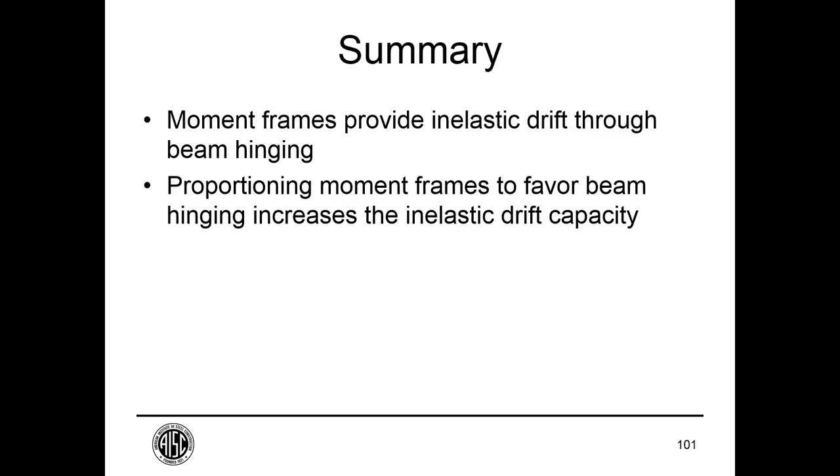So in summary, moment frames provide inelastic drift through beam hinging. Proportioning of moment frames favors beam hinging and increases inelastic drift capacity. We have to be careful of our highly restrained welded joints at beam to column connections. To protect them, they require attention to detail to allow yielding to occur somewhere in the beam before rupture of these joints.

All right, so with that, I'll remind you that we have a couple weeks off, and then we come to seismic design of braced frames.

Okay, thank you, Raphael.

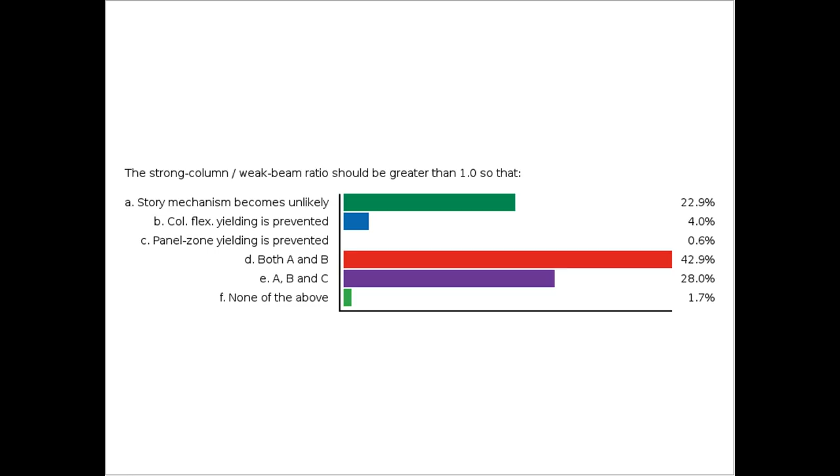But under expected levels of compression, there will be less tension in those anchor rods, so those anchor rods will effectively be delivering more force and holding that base plate down more than one considers in the design of the base plate. So to summarize, the compression in the column is another source of overstrength of the base plate and has to be overcome before the base plate will yield.

Okay, I'm going to go to slide 33.

Okay, here's the question. The flexural length is assuming the beam spans into the flange of the column.

What if the beam frames into the web of the column? Yeah, so if the beam frames into the web of the column, you can take a similar approach. The panel zone shear deformation is likely to be pretty small for the column oriented in its weak axis, because instead of the web you have two flanges, and the flanges tend to be quite a bit heavier than the web, and of course there are two of them. So I think the centerline modeling we discussed is reasonably calibrated for a column oriented in the strong axis, and might be more flexible than it needs to be for a column oriented in the weak axis.

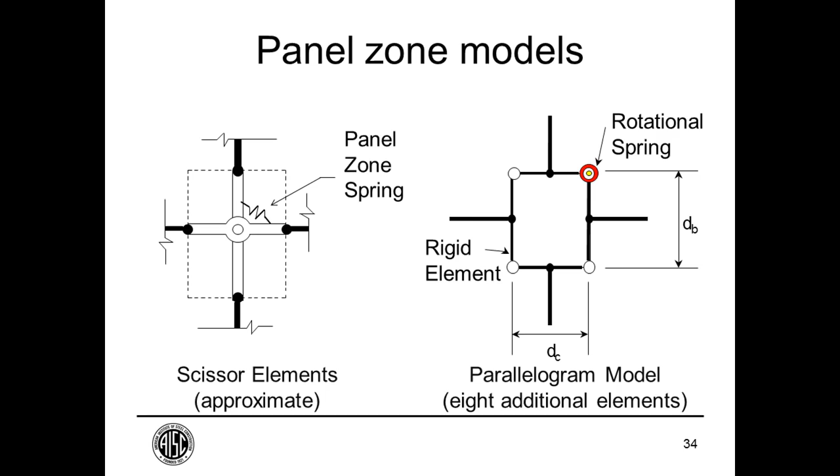Okay. And then just for clarification, I'm going to move to 70 here. Can you clarify what M sub PC is?

So MPC star is part of that strong column weak beam requirement in AISC 341 chapter E3. That's the column moment capacity part of the strong column weak beam. That's a strong column weak beam ratio.

So this is the, let's see, you still there, Raphael? Yeah, sorry, I was looking for which slide we have that ratio on. It's on slide 69.

So there's the strong column weak beam ratio, MPC star and MPB star. It's the moment capacity of the columns, say the column above and below the connection, compared to the moment capacity of the beam left and right of the connection. The MPC star is the plastic section modulus of the column times Fy minus how much we're using in axial, using the same load combination. So usually this is the overstrength seismic load divided by the area of the column.